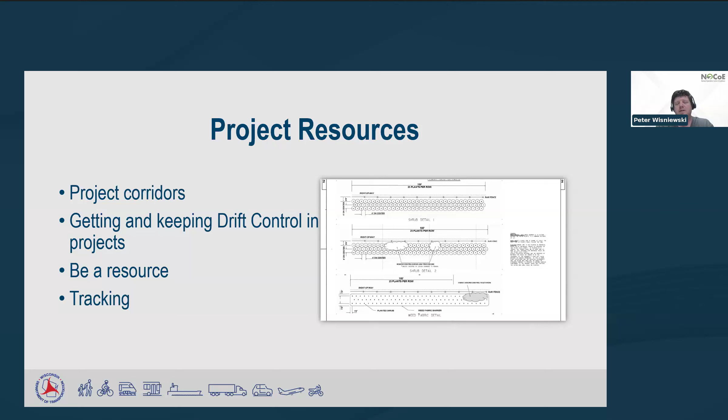Out of the roughly 12,000 miles of highway that WisDOT is in charge of maintaining, I have roughly 700 or 800 miles of recorded known drifting locations, and that was only for half the counties across the state. So even if you extrapolated that out, the savings across the board, or future savings as these installations pay for themselves, could really add up for maintenance, pavement longevity, and salt use.

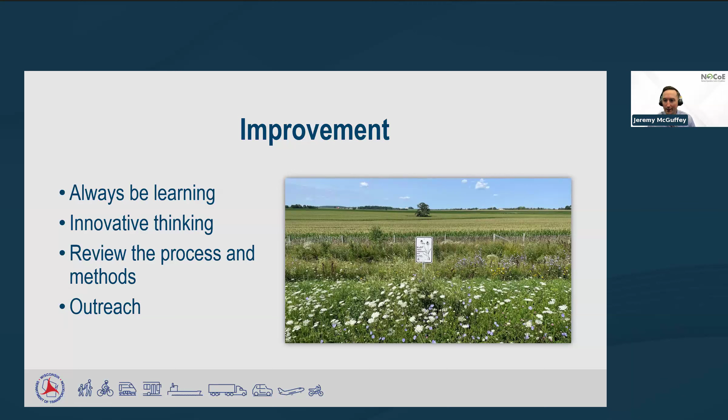Peter, I appreciate it. I really liked the ideas behind including this on existing capital projects and things that come through an area, because that's often overlooked. So great stuff. Our next presenter is Craig Bargfrede with Iowa DOT.

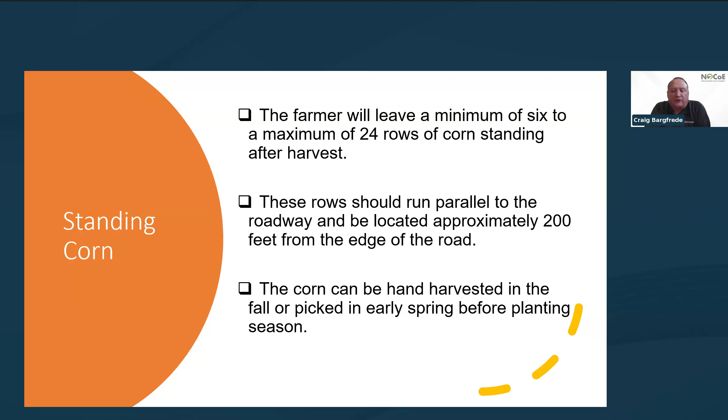How we determine our compensation: we pay the farmer based on yield data. In the fall, once harvest is complete, our staff go out to the farmers who have expressed interest in the program. They sign them up and take measurements, the length and width of the amount of standing corn remaining. They get the yield data from the farmer using either yield monitor information from the farmer's combine, or the information farmers turn in for their crop insurance program. That's how we determine how many acres and the bushels per acre the farmer has out there in the field.

The way our program works is on August 1st, at the close of business, I poll 50 grain elevators randomly from across the state of Iowa and record their closing cash price for October new crop corn on that day. I use that to determine an average statewide price, then add $2 a bushel to that price as an incentive for farmers to participate.

Standing corn agreements are for one year, and in the agreement, we ask that farmers leave the corn standing until at least March 15th each year. So what is our pricing for this year? $5.75, as you can see, is what we determined. For the last few years, we've also been paying $1 per linear foot for round bales, for temporary snow fence, and for permanent fence.

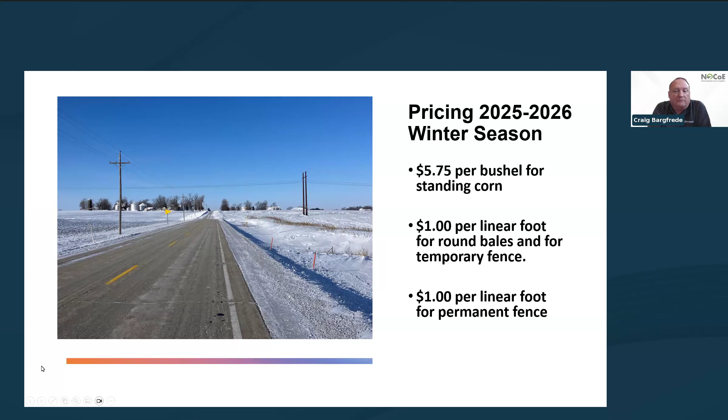Next. So how do we go about the particulars of signing folks up?

The promotion of this program is about 99.9% on our local maintenance forces. They know their areas better than we do. They know the people, they know the farmers, they know where their known trouble spots are. So we have built a pamphlet that we give to our field maintenance staff, which they take out and use as a door opener to talk to farmers and try to recruit new ones into the program. As I mentioned, we have a lot of long-standing participants in this program.

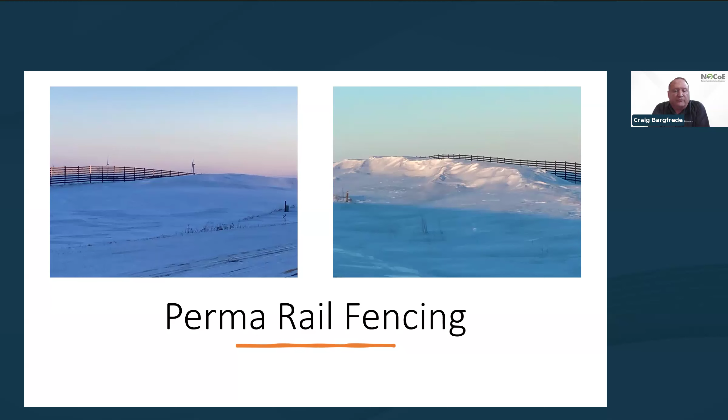If you go to the next one, please. It gives you a pretty good perspective of some new perma rail fence that we installed in our Ashton garage, which is up in northwest Iowa. So really, they're able to farm around this, and it's really not taking up a lot of acreage.

One thing we point out with this program is that if a farmer agrees to participate with us in a perma-rail fencing program, we like to sign at a minimum a 10-year agreement. Preferably, we'd like to go up to a 15 to 20-year agreement, just so we can recoup some of the cost for the fencing, which right now is probably somewhere in the neighborhood of $60 to $65 a linear foot to install. We do the installation, we do the maintenance.

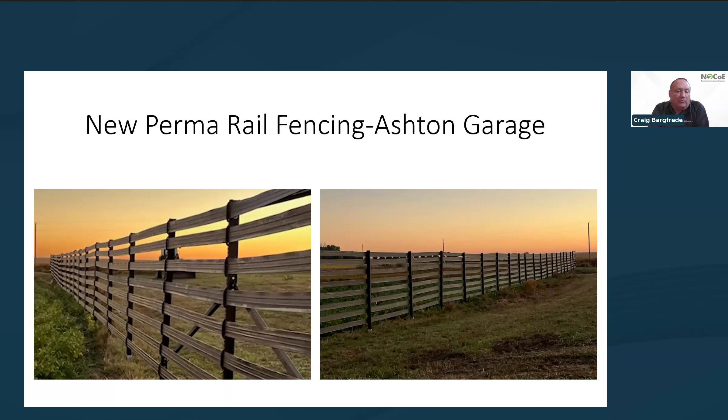So in the fall of the year, those garages that have this type of fence, once harvest is completed, will get permission from the farmer to go out there, check everything, make sure everything is nice and snug and ready for the winter season. We have lots of options.

Jeremy, that's all I have, unless there's any questions.

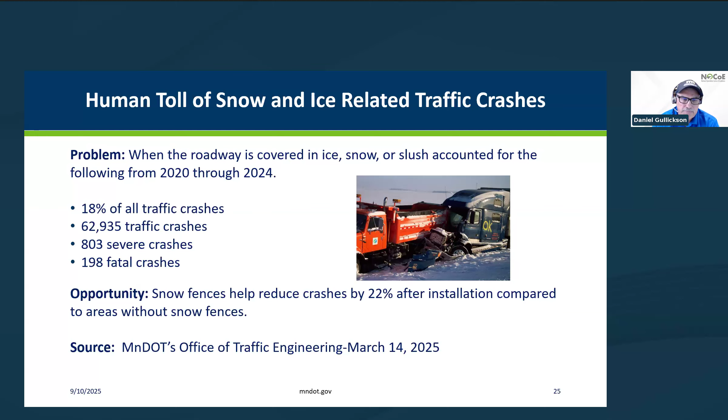One of the keys to a maturing snow fence program is knowing when and where to deploy snow fencing. At MnDOT, we have a team of designers whose job is to design blowing snow control treatments. We look at existing blowing snow problems, whether land use has changed in these areas, and maybe a new roundabout project that's going to create a future snow problem. We get involved with our program delivery folks to look at upcoming projects and how we can prevent blowing snow problems after they're built, and also find available funding to help solve these problems.

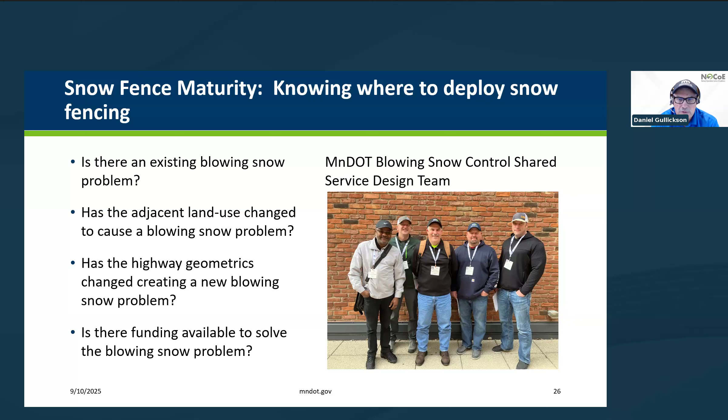In Minnesota, along our MnDOT maintained roadways, we have about 737 living snow fences. Many of them were planted in the 1970s, maybe even earlier, and they're still providing function for us.

We have 223 structural snow fences, and our structural snow fencing is the flexible composite rail type system. Permarail is one of the manufacturers, and we also have another manufacturer named Magnum Ventures that make the structural snow fence for us. They come in 4, 6, 8, and 10-foot tall heights. We also still put up the seasonal snow fencing that's 4 foot tall, put up in the fall and taken down in the spring.

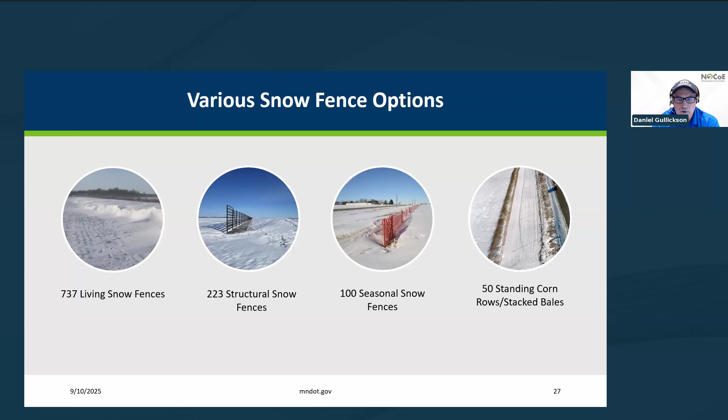And then working with landowners and farmers to do standing corn rows. Standing corn rows is our gateway to work with a farmer or landowner to show the benefits of managing blowing snow, and it's our gateway to introducing them to maybe a future living snow fence or structural snow fence that ends up being a longer term commitment.

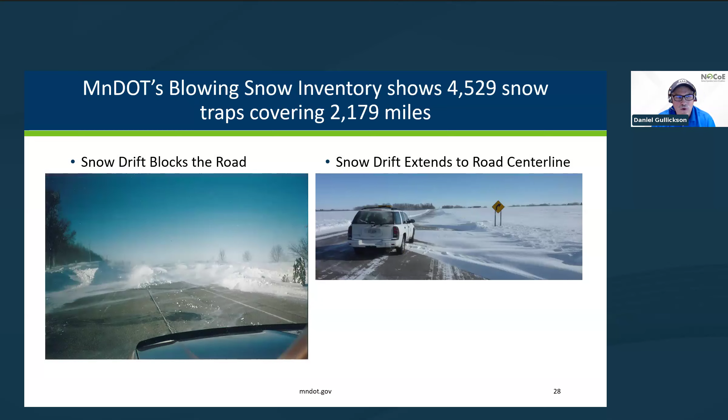MnDOT has been inventorying our snow problem areas, which we call snow traps, since 2001. We've got about 4,529 snow traps covering about 2,179 centerline miles of roadway. Seeing the drifting on the road is one thing, but blow ice is a little more difficult to explain.

To understand if we have a maturing snow fence program, we have to understand the past. Unfortunately, we don't have any MnDOT employees who worked back in the 1930s and 1940s that I can talk to about what they did then. But looking at the Minneapolis Star Tribune, Star Journal magazine, they had an article noting that back in 1942, MnDOT was spending $1 million on snow and ice. Of that $1 million, $180,000 was spent putting up slat style snow fencing, about 1,000 miles each year, accounting for about 18% of their snow and ice budget.

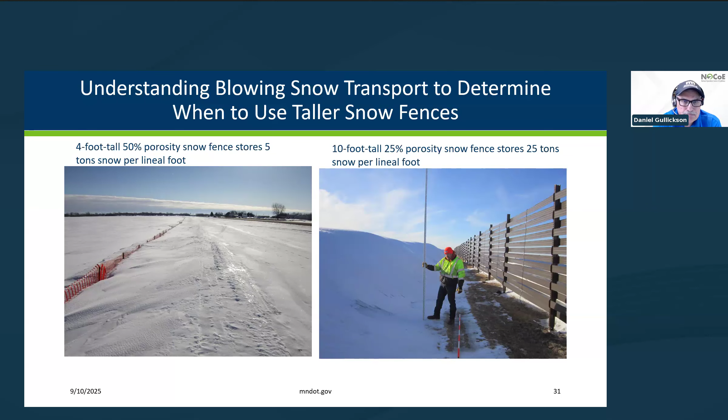Back in the 1960s and early 70s, mechanical snow removal became more popular, using brute force to open up our roadways. We know this equipment can't be everywhere at once, and having closed roadways is very damaging for freight and commerce. So what we've been looking at is where to deploy snow fencing in areas where we have to go in with heavy equipment, to reduce the need to do that.

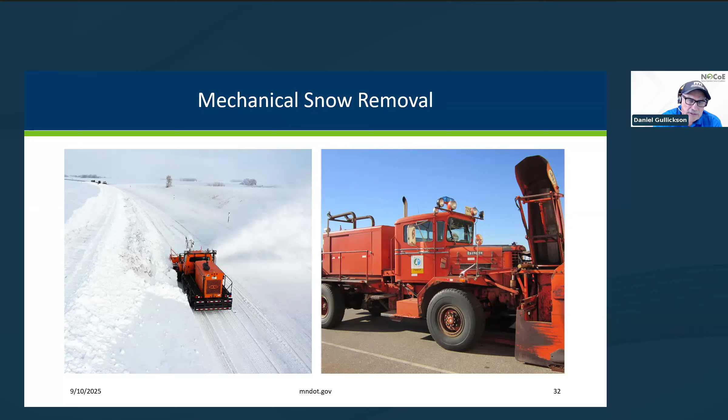A teaspoon of salt has the capability of polluting 5 gallons of water - that's from our Minnesota Pollution Control Agency. We've found where we've deployed our snow fencing, this is along Interstate 94 east of Moorhead, that we were able to reduce our chloride or salt use by 40%. That's a huge savings in terms of helping reduce water contamination and being more efficient with our salt.

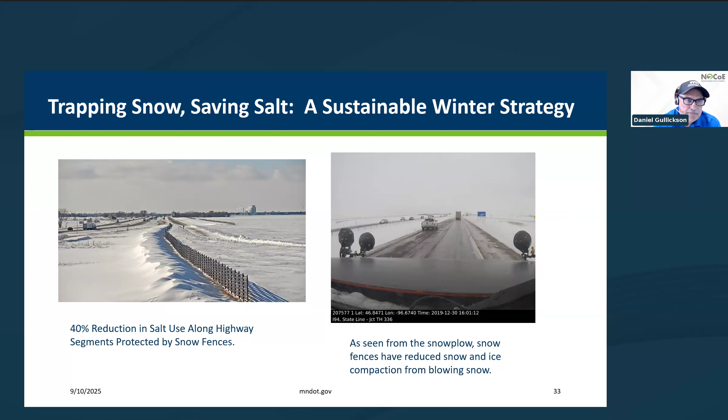In 1991, Ron Tabler, who you've heard before, reintroduced MnDOT to the science of passive blowing snow control. I had the opportunity to be there for that conference, and we really were connecting our maintenance office and our design community to work together. Ron Tabler said blowing snow isn't just a maintenance problem that you plow your way out of - there are things we can do in design, like widening the ditches, raising the road profile, adding snow fencing. These work in harmony and help our snow and ice fleet be more efficient.

With Ron's help, and funding through MnDOT research, we were able to create a one-stop shop: snowcontroltools.umn.edu. That Snow Control Tools website is our one-stop shop that we go to get our design and winter climate data used in our snow fence design. We also have a cost benefit tool there to see if the fence is cost effective to pursue, and previous research projects are linked there. This is really a good resource for you to use to learn about blowing snow control.

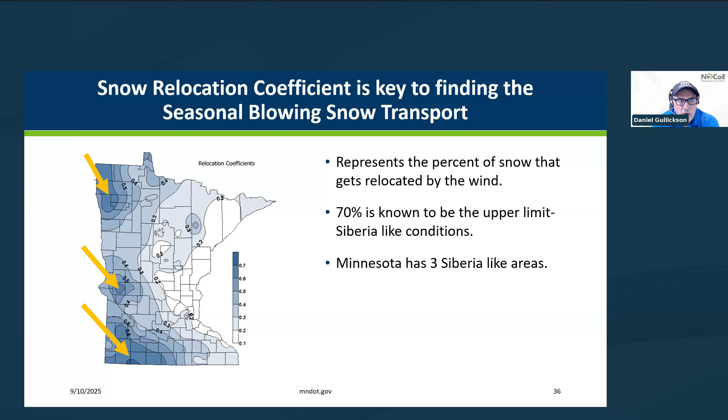One of the things that comes into design is location. In our state, we've got 3 locations that are Siberia-like in condition in terms of the amount of snow relocated by the wind. With this tool, we can really look at the location for determining what the appropriate fence offset should be from the road. It's looking at climate data from 370 observation sites across the state and using Dr. Tabler's algorithms to help us design interactively.

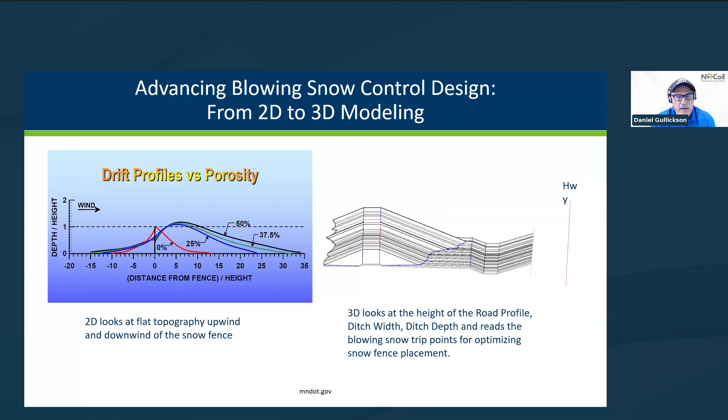One of the things we're moving towards is going from the 2-dimensional world to the 3D world. In the 2D world, as we see in the image on the left, it's looking at everything in flat topography - we can see these snowdrift profiles based on fence porosity, but you're not seeing a ditch or the undulation in topography. The image on the right with 3D looks at the road profile, its height, the ditch depth and width, and starts to visualize what that snowdrift will look like on the landscape.

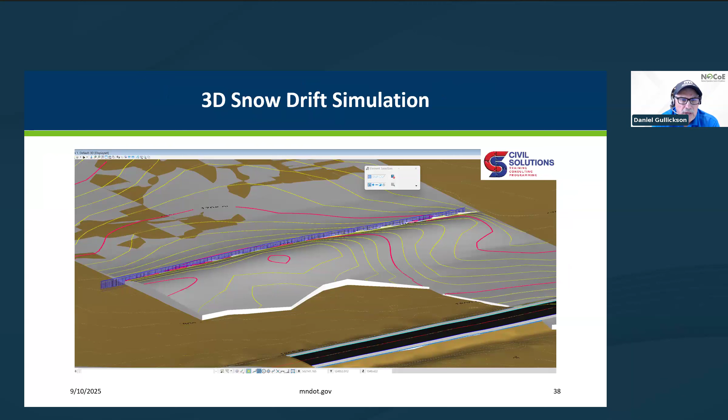We are currently working with Civil Solutions, an engineering firm out of Chicago, Illinois. They're working with us to develop a 3D snowdrift simulation that would incorporate the design of the snow fence, looking at the undulations in topography, and draw what that snowdrift would look like - which will be a really good communication piece for landowner engagement, as well as working with our maintenance community.

As MnDOT looks to the future, we're taking more of a corridor approach to blowing snow control. That's going to create a more consistent driving experience for the motoring public.

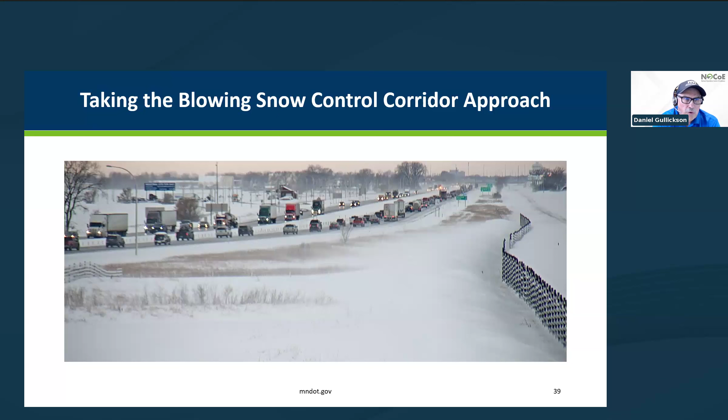As we look at this corridor approach, we're looking at the frequency of road closures and crash data to help guide where we should prioritize our efforts, because we have like 5,000 snow fences out there. Where do we begin?

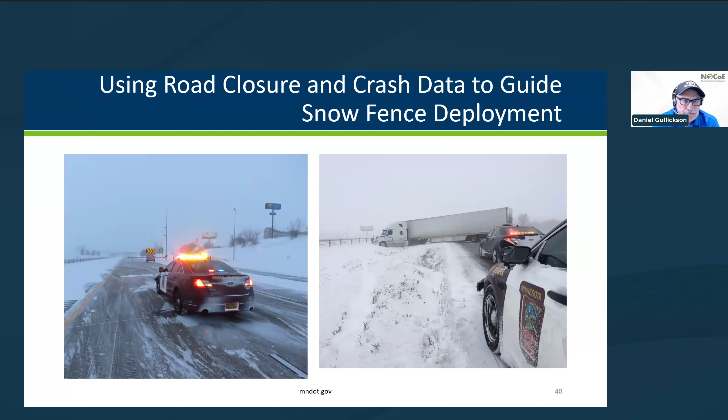We also look at the labor, material, and equipment costs that are being tracked in terms of what's being spent on those plow routes.

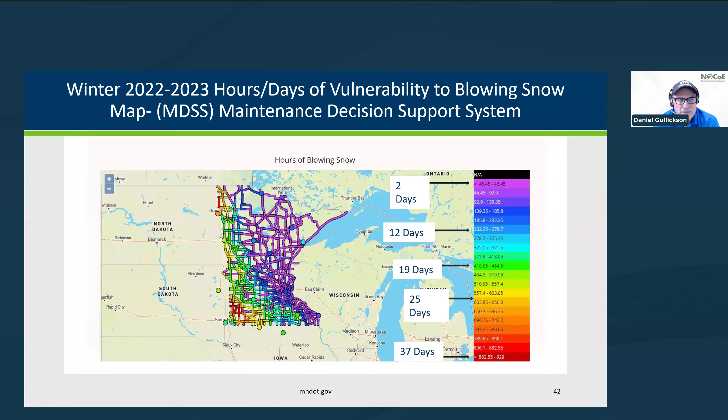We are managing the wind, that's what we're managing. With the Maintenance Decision Support System, the MDSS, we look at the frequency and the vulnerability for where wind is a problem. As we get into the western part of the state, we're looking at upwards of almost 800 to 900 hours where the wind is moving that snow around, and that helps us see where the greatest need is for snow fencing.

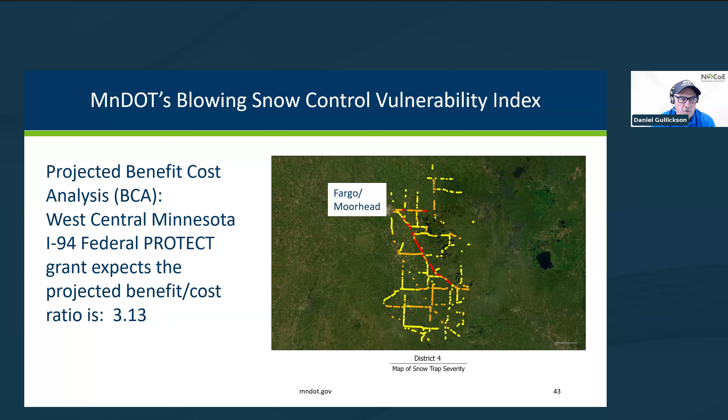Utilizing this concept, we're able to start to see which corridors in a MnDOT maintenance district would show up as being the most important ones to address. This would be the I-94 corridor in this case, with the areas showing up in red. This scoping tool really helped us be successful in getting a federal Protect grant to help with the mobility and transportation of this very important corridor. We found with this Protect grant a benefit cost ratio where for every dollar spent, there was going to be a $3 return.

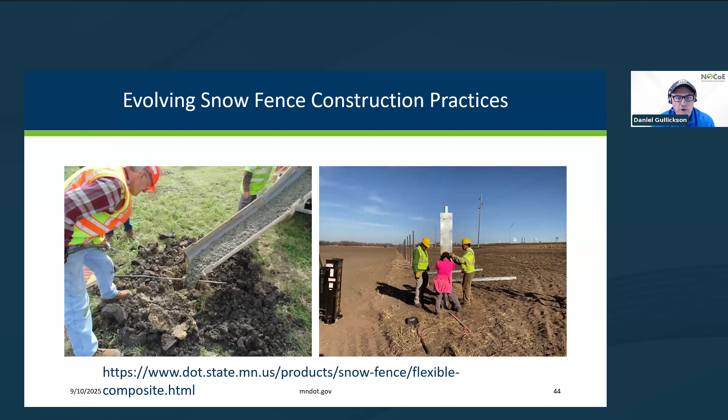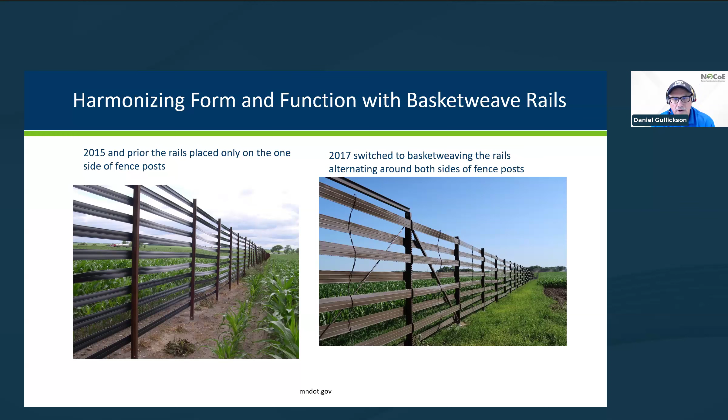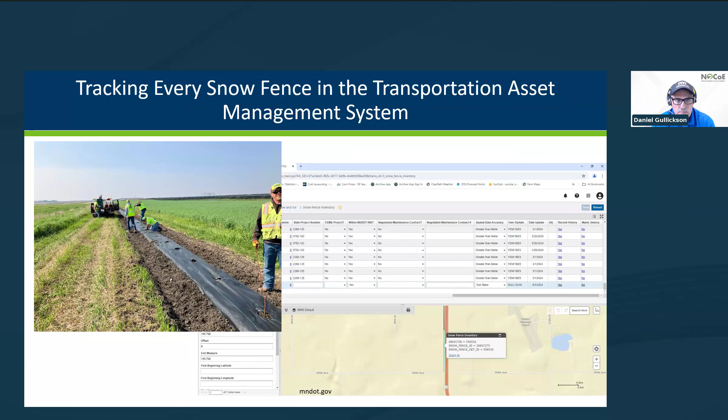Good fences make good neighbors - making sure we keep our rails tensioned properly so they're not sagging. Mowing around the perimeter of our snow fences during establishment really helps control weeds and helps get more sunlight to the living snow fence to help them grow faster.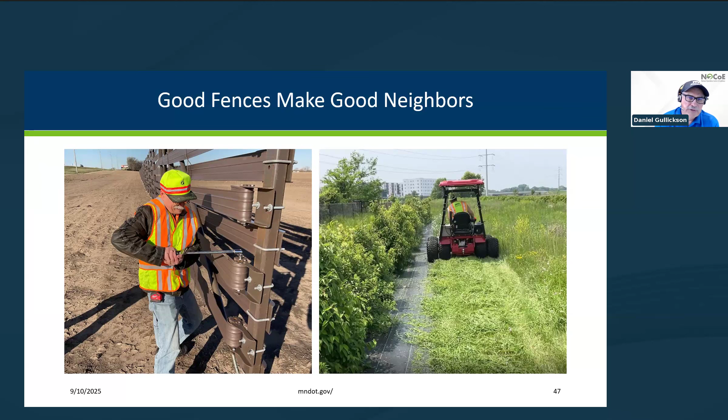Because a lot of our living snow fences are starting to get to be 20 years old, we are now going in and rejuvenating them through coppice pruning. By doing that, it will take out the deadwood.

As we track our snow fences, we spent about $370,000 on snow fence maintenance over the past year, which includes the coppice pruning, tensioning and tightening of our snow fences, and mowing.

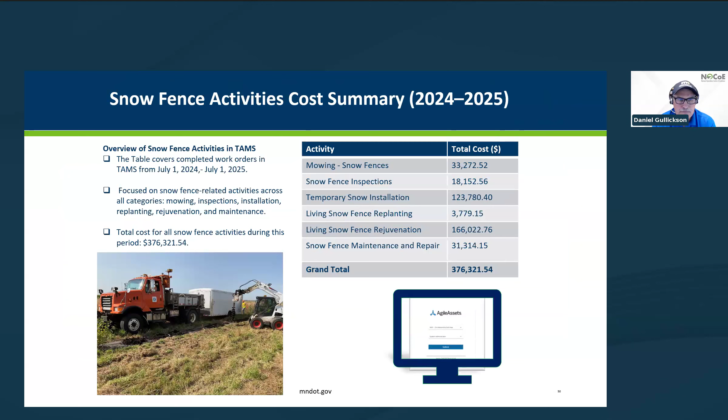With that 100-foot section, we found it was generating about 11 kilowatt hours of energy per day throughout the year. The snow fence is oriented east to west, and the panels are on the south side of the posts. If you wanted to meet the needs of a typical household, that's about 30 kilowatt hours per day.

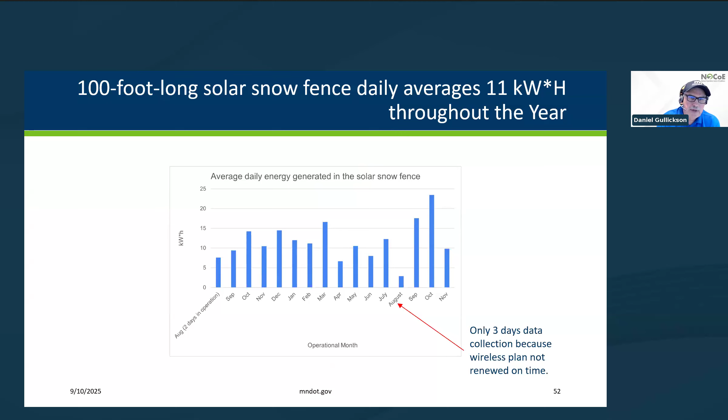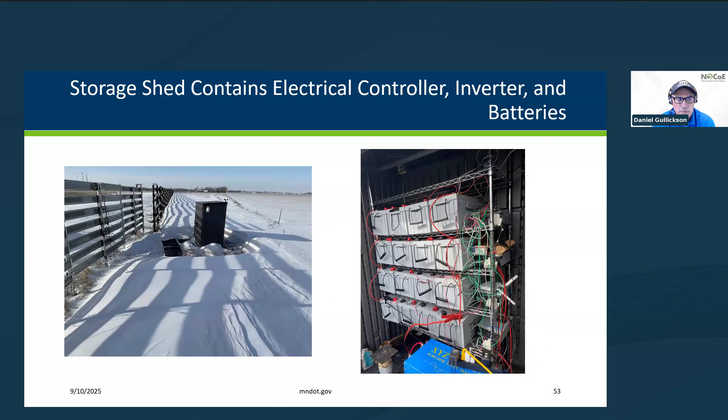With this test project, we did not incorporate the energy into the grid. We utilized it on site, putting it into a shed where there were batteries with the inverter and the controller. We used that energy to power the webcam out there along with the weather instrumentation.

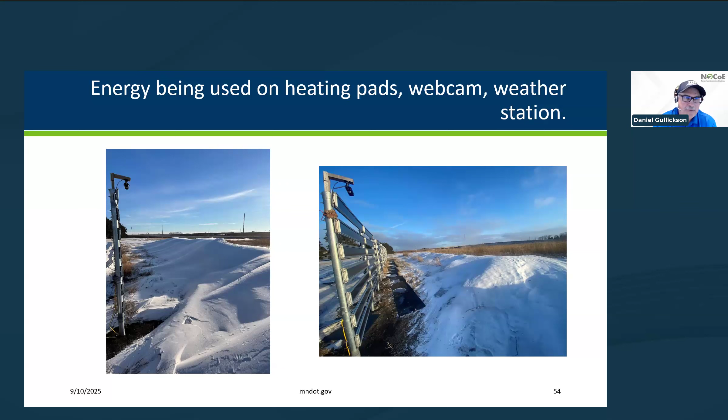As we look to the future, look for value added. Maybe it's putting the snow catch area into pollinator habitat, like we heard for bees and monarchs and grassland nesting birds.

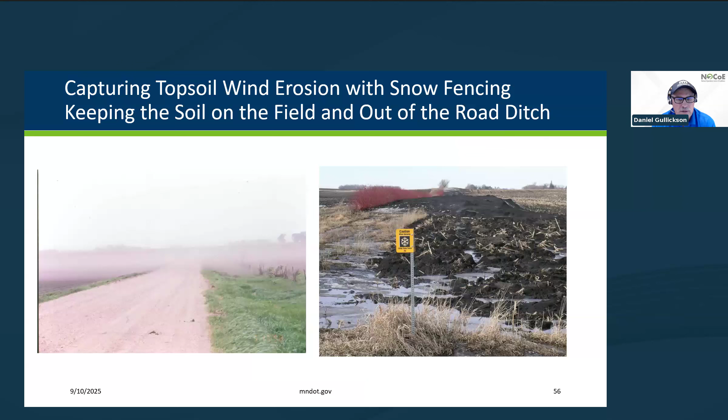Maybe it's to help reduce wind erosion, keeping that topsoil on the farm field and not in the ditches. Or maybe it's for the beauty, that might be the reason for someone to want to entertain doing this.

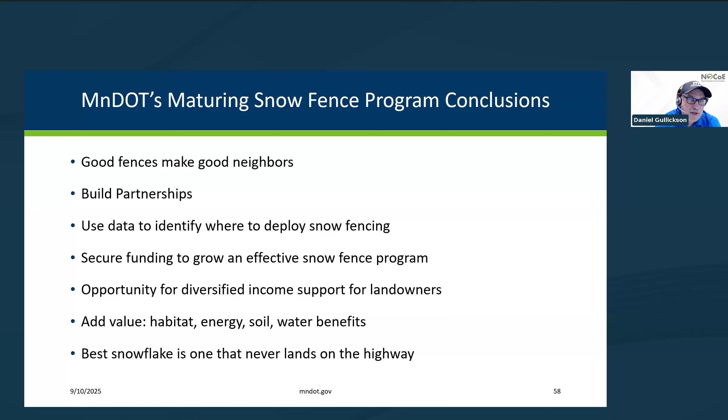In closing, a maturing snow fence program means good fences make good neighbors. Build those partnerships, use data to identify where to deploy snow fencing, secure funding to grow an effective snow fence program, look for opportunities to diversify income for landowners through snow storage, and get that habitat, energy, and added value. As Rick Nelson said talking about winter ops, the best snowflake is the one that never lands on the highway. Thank you.

Great job, Dan, and appreciate the plug there for the Talking Winter Ops podcast. I think we might have a link to that as well. I noticed you appeared on that as a guest speaker recently, talking about your blowing snow control efforts. So yeah, great job on that. I appreciate you explaining the history and the planning that went into your program. I know your program overall has matured quite well over the years, so it's cool to see how far it's come since its inception, as well as the cost benefit analysis you guys have done to show that it really is worth its salt, mind the pun.

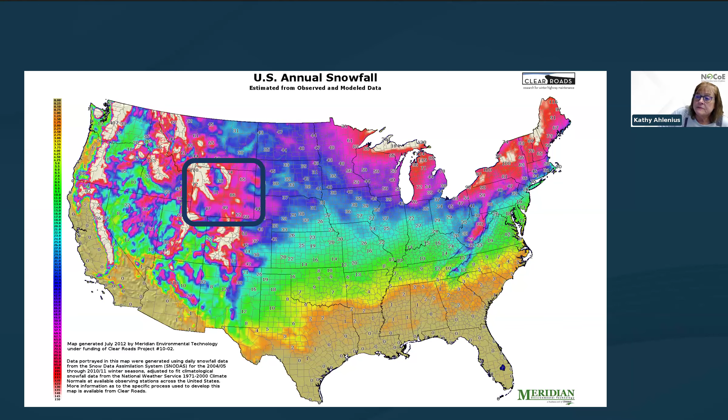And over 1,000 hours of blowing snow. If you look in the middle of that red blob with the white spots in it, I-80 runs right through there.

WYDOT, the highway department, has been using snow fence to control blowing snow since before we even had paved roads. In 1971, Dr. Ron Tabler was hired as a consultant for WYDOT to help keep the newly opened I-80 route open. The first year it was open, it was closed more than it was open during the winter.

It earned the name the Snow Chi Minh Trail, for those of you old enough to remember Vietnam references. Dr. Tabler's research led to a resurgence in the use of snow fence, not only in Wyoming but in other states like Minnesota, Iowa, and Wisconsin, and also worldwide. The work he performed in Wyoming also led to the manual Controlling Blowing and Drifting Snow with Snow Fence and Road Design, published in 2003, still the go-to book for many of us.

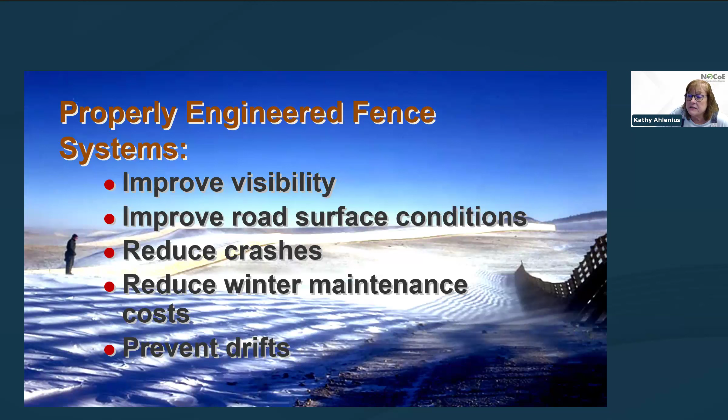From that research, it was determined, as we've seen in some of the other slides, that properly engineered fence systems improve visibility, improve road surface condition, reduce crashes, reduce winter maintenance costs, and prevent drifts on the roadway.

So there's several things that we look at when we're looking to site snow fences. We have a lot of wide open spaces here in Wyoming, but adequate storage capacity is critical. You need to have enough room to store the snow that you're going to trap with the snow fence, plus any plow cast you get from plowing the road.

We want long, tall, and porous fences, and then they need to be properly located with alignment and placement to the wind and the roadway, the setback from the road, and then any openings.

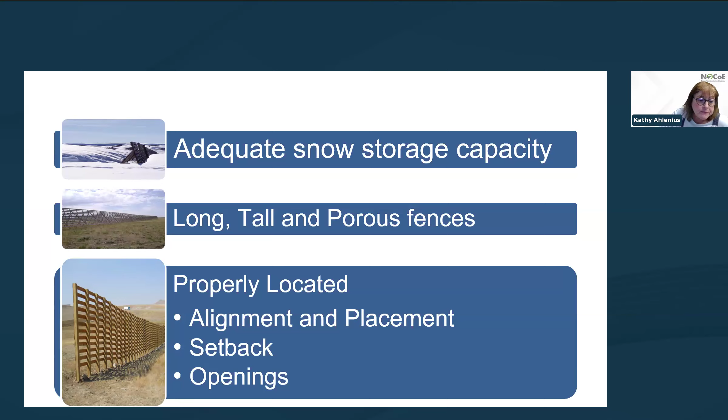So what makes a good snow fence? Height of at least 6 feet, 40 to 50% porosity, a bottom gap that's about 10% of the total height of the fence. Dr. Tabler determined horizontal rails are best, even though a lot of us are still using 4-foot lath fencing. And the most critical thing is that they're durable and maintained, because they sit out there all year long, not just in the winter. You need to make sure they're maintained so they stay up.

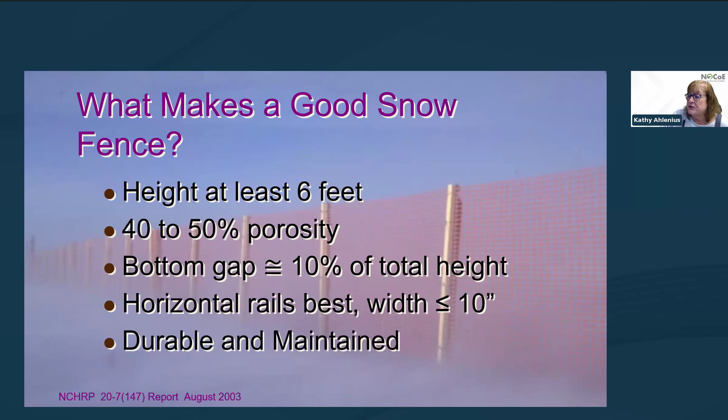So in 2005, WYDOT started an asset inventory program with the survey of our snow fences. We contracted with a local engineering firm, Trihydro, to go out and collect the data on our snow fences. While there have been changes here and there, right now we've got about 460 miles of snow fence on 6,733 centerline miles of roadway.

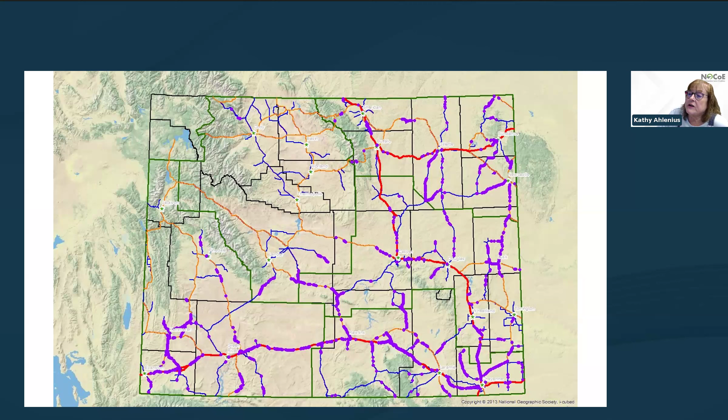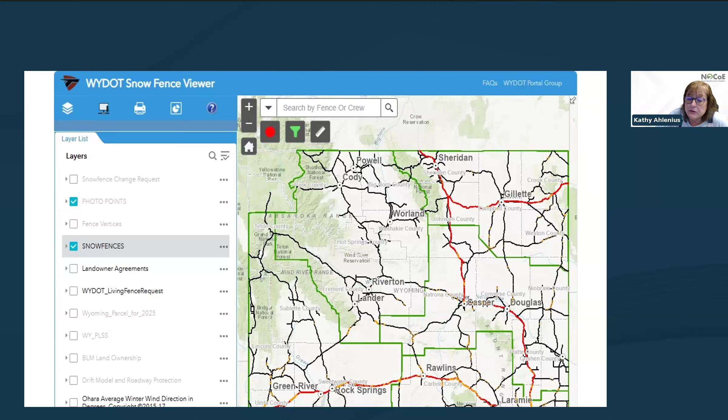So next slide, the latest iteration of our snow fence management tool is the snow fence viewer. This was again created by Trihydro, who have been our consultants during this whole program. The viewer was created in 2016, and it was built using Esri's App Builder and ArcGIS Enterprise.

So there's a lot of information on these slides, or in the viewer. A lot of it's controlled by the scale, whether you're zooming in and zooming out. We've tried to get enough information on the fences that it can be a one-stop shop for our maintenance guys and any other entity who's using our viewer.

So by clicking on a fence, you can pull up a lot of information. Each fence has a unique fence ID number, and then a fence number that's just based on the milepost and the fence within that milepost.

We also have it so you can get it tabular. If you look at the bottom of the screen, for every fence, you can pull up a table that gives you information on when we refaced it, repaired it, what crew it belongs to, the offset from center line, the bottom gap based on the first panel of the fence, the panel width, anything that we think could be useful for the maintenance guys to know if they need to order 16-foot boards or 12-foot boards.

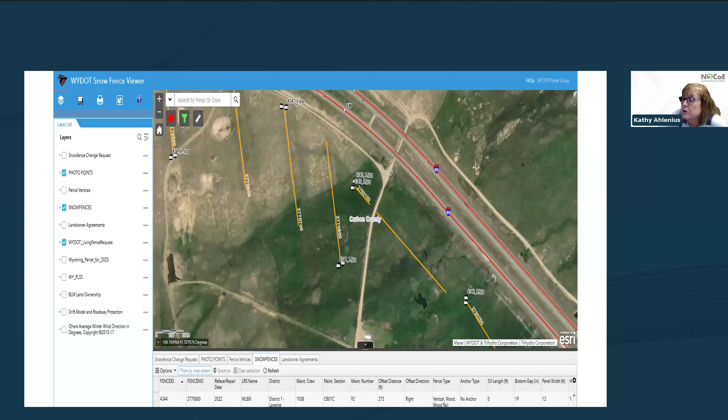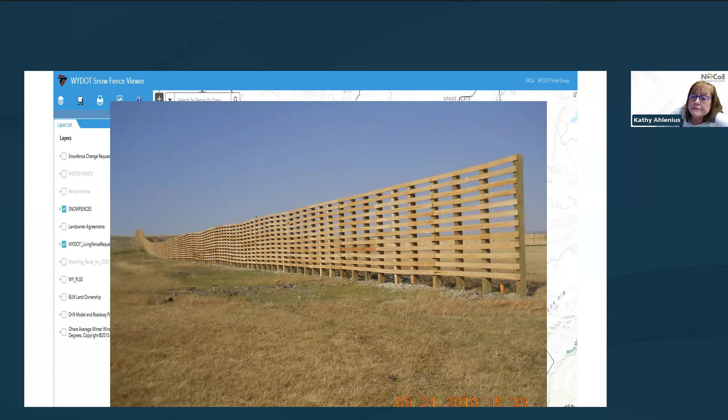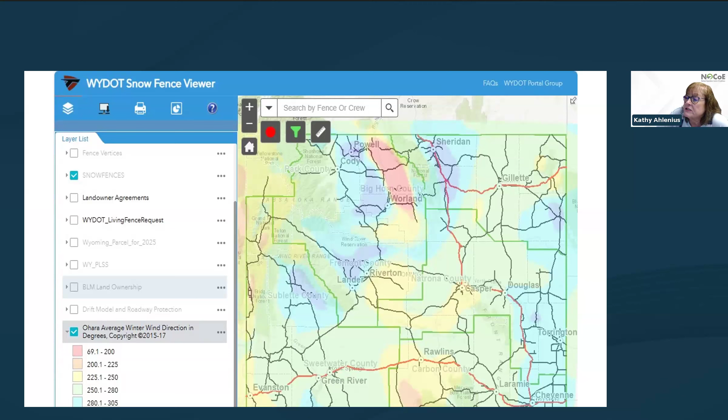So next slide. We also in 2017 contracted with the University of Wyoming to update Tabler's wind and precipitation tables that he had created back in the 70s. Dr. O'Hara used the PRISM data from Oregon State along with some other data sets, and we now have a winter wind direction that we can show statewide.

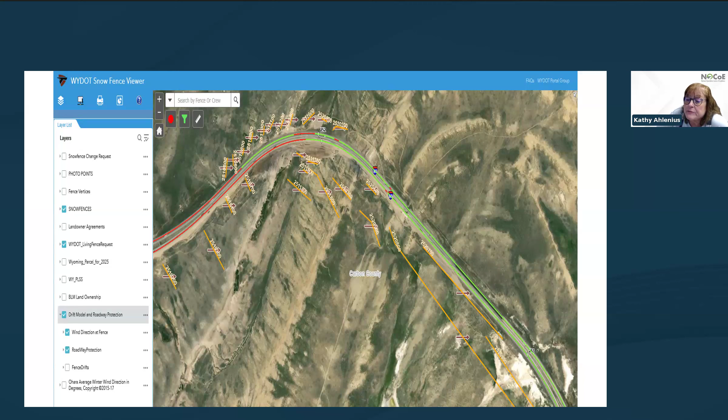Next slide. And from that, we can show the wind at the fences and what part of the roadway they protect. Now, this is not an exact science, because to go to each one of our, I can't remember, 3,600 fences is quite a chore. So this is just a modeled wind at the fence, and then it shows you what part of the roadway is protected. We can also show where the drifts would build based on this modeled wind direction. I don't have that as a slide, but we have a lot of information that we can show on these fences. And that's it.

It's just a really quick and dirty presentation. Yeah, that was really cool actually. The whole asset management piece is particularly interesting as far as the snowing or the blowing snow asset management goes.

Question for you real quick before we open it up for Q&A: if folks were interested in learning more about the tool or even deploying something similar, is there someone they can reach out to? You can definitely get a hold of me.

I know Trihydro is a national firm, but the key part of all of that is you really need to know what your wind directions are, and that makes it a lot easier to come up with your fence design and placement.

Great. Yeah, and I see Zach put your contact information there for folks. So everyone, I would encourage you, if in your state or agency you're interested in deploying something like this or just learning more about the tool, Kathy is really smart about all this stuff, and I'm sure she can help point you in the right direction.